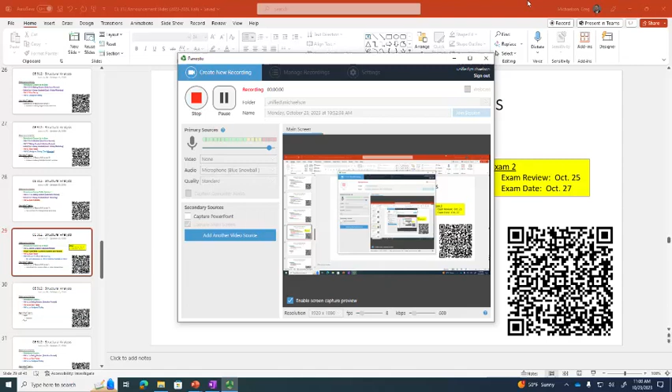Let's get started. Lecture 27. I think we only have 41 lectures, so we're in the last third of the semester. It's one of those things, did it go fast or did it go slow?

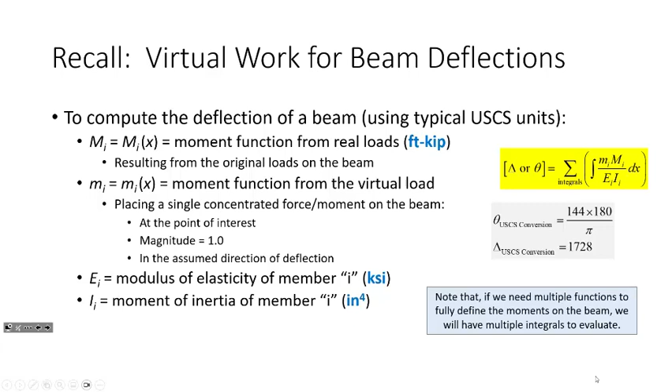More often than not, in real problems we have to sum up a number of integrals, and don't forget we have our conversion factors to consider as well. I want to generalize the method of virtual work a little bit, and I've removed a lot of the subscripts from this just to get to the heart of what we're talking about here.

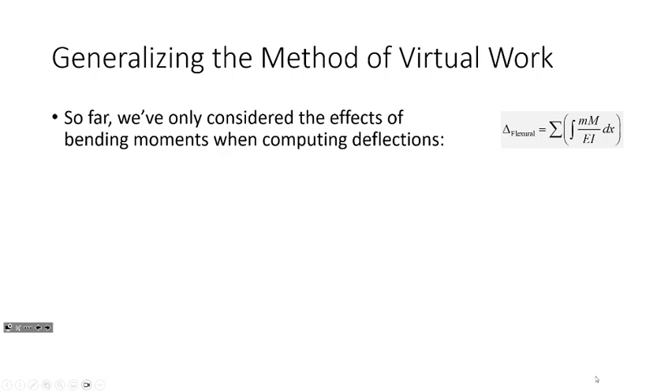So far, we've only been considering bending effects when computing deflections for beams. But in general, for a structural system, if I don't tell you anything about what it looks like or what's going on, then as an analyst you should consider that potentially all this stuff could happen. If we're talking about a truss, we have axial deformation, but for flexural structures we also have flexural deformation. If we were twisting the structure, we might have torsional deformation.

Some of this notation might jog your memory from Engineering 216, Mechanics of Deformable Bodies—remember TL over GJ to get the angle of twist. Shear deformations, I'll talk a little about that later; I'm not expecting you to do anything related to shear deformations in this course, but I want to mention it. And then there's also the potential for thermal elongation.

For example, you take a truss and you heat it up. We're not going to do anything with it, but there's nothing really special about it, it's just basic mechanics you did last semester. What I would say is that as the analyst, when we're computing deflections, we really only consider the terms that are relevant. So for example, if we have a truss and we're not worried about thermal loads, we're only considering the axial deformation terms and taking all the other terms to be zero.

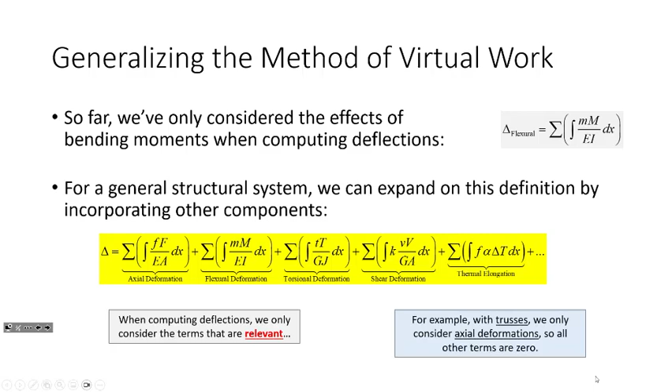But I posit to you that it's possible a structure could deform in more than one way, and considering all of these we might get different answers. We're going to talk about when to consider certain things a little later.

So for frames, if all we're talking about is 2D frames, and all we're talking about is mechanical effects, then I propose we would have three components to consider: axial deformations, flexural deformations, and shear deformations.

Now I'm not going to worry about shear deformations with you right now. We'll talk about that a little bit later. So what we're only going to consider for our purposes is axial deformation and flexural deformation. Now the process isn't going to change. We're still only going to perform two analyses: the real structure and the virtual structure, where we remove all the loads and only place a single load at the point of interest with a magnitude of 1 in the assumed direction.

What I propose to you, and I think the only way to really show you, is to actually do an example. So for frames, just for now, we'll talk about shear deformations later, but if you're only considering flexure and axial, then I propose that for most frames you can neglect the axial deformations. The best way of explaining that is to do an example.

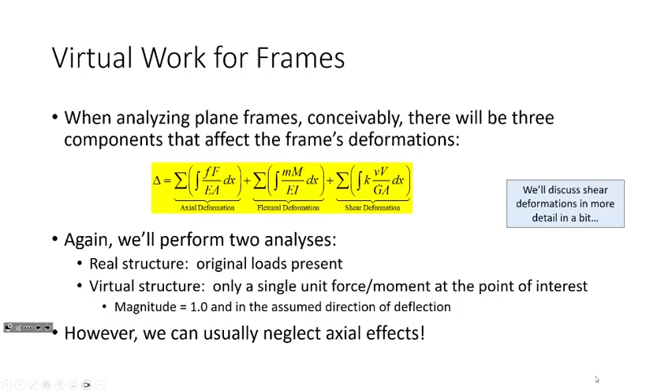So we're going to look at this structure, and we're going to compute the deflection at point A. A lot of the problem is going to be the same. We're doing a real structure and a virtual structure, but we're going to compute the deflection considering two things. The first is we're only going to consider flexural deformations, and the second is we're going to consider both axial and flexural deformations.

And just to be clear what I'm talking about: if I have flexural deformations, I'm talking about the member deforming in a bending type fashion, I'm talking about it bending. Whereas if I'm talking about axial deformations, I'm talking about the element stretching or compressing along its axis. I propose you're going to get deformations from both modes, but one of them you can kind of ignore, and you'll see what I mean.

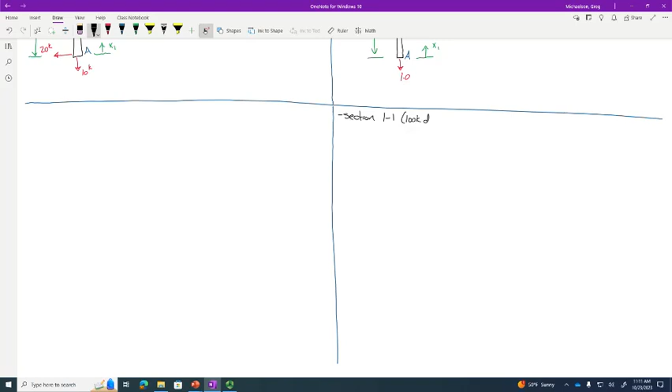So let's start off with section 1-1, and I'm going to look downward. Let me scroll up a little bit so we can see what's going on. So I'm cutting a section and I'm looking downward. Okay, so cutting a section looking downward, this is what I've got going on.

All right, so cut my section. Whenever you cut a section through an arbitrary point in a structure, how many unknowns do you have, at most? If I just cut a section through a random arbitrary point, how many unknowns do I have? 3, right? An unknown force in the x direction, unknown force in the y direction, unknown moment. Everybody with me on that?

So if I look at this, that means I have an unknown force, let's say in the x direction, unknown force in the y direction, unknown moment, right? With me so far? So we'll call this, let's do it like that. So if I sum forces in the x direction, that's going to be here. Let's label these a little bit. Let's call this right here the shear, that the axial force, and that the moment.

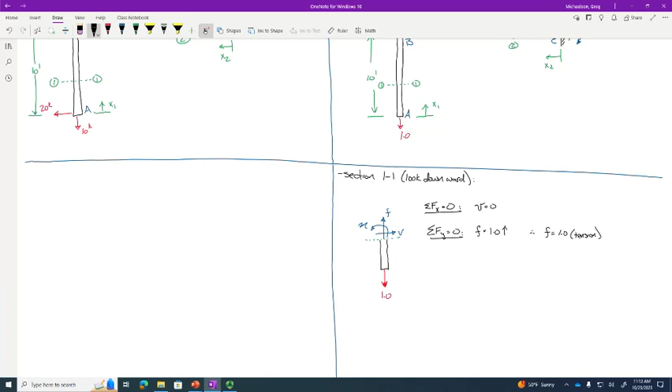Now, if I sum moments, what's my little m? What's this little m going to be? 0. It's 0, right?

So if I were to write this a little more formally, maybe what I'll do is I'll say F, and we'll call it member AB, is 1, assuming tension is positive, and that's from x equals 0 to x equals 10, and MAB is 0, and that's going to be valid from 0 to 10. Does that make sense, what I'm doing right here?

Now, why am I not writing the V? Why do I not care about the V? Because I'm not going to use it for this problem. I'm only going to use the little f and the little m. I could use it later, but right now I don't really care. It wouldn't matter anyways because it's 0. Make sense? So far, so good?

Okay, so now what I'm going to do is this: I'm going to now look at the same problem over here. All right, so now I'm going to look at the real structure, and I'm going to cut a section and look down. So let's draw that out. So I've got—here's my structure.

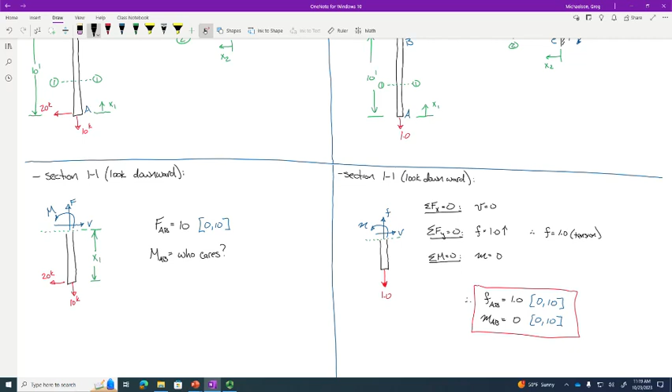That was kind of why I did the virtual structure first. Make sense? So you could argue that in some cases it's sometimes advantageous to do the virtual one first, because you have a better chance of having a 0 force section on a virtual structure since there's a lot less loads. So just worth mentioning.

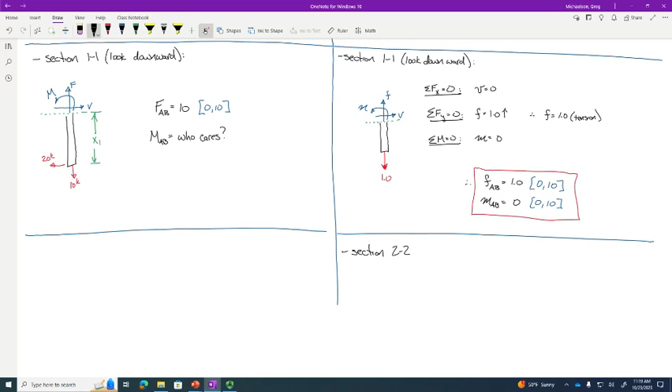So what I'm going to do now is look at section 2-2. Let me scroll up a little bit to make sure we're all on the same page. So now what I'm going to do is cut a section here, and I'm looking to the right. So with both sections, I'm going to cut a section and look to the right. If I cut a section on the virtual structure and look to the right, it's going to look something like this.

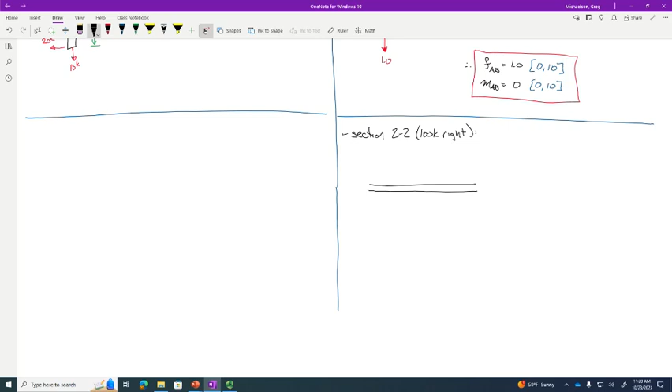Let me give myself a little bit more room here. So if I look to the right, here's the beam, here's my support reaction, and then I've got my reactions over here. This one right here is 1. This one is 20 feet. This distance here, x2.

Okay, and then let's put the unknowns, and we can draw them all, but I'm only going to care about 2 of them. So I'm going to have a V, F, and M, and I'm drawing those in their positive sign convention. When you cut a section and look to the right, downward shears, clockwise moments, and then the axial forces in tension. Now if I look at this free body diagram, what is F?

What is F going to be? 0. There are no forces going to the left or right, so that's 0. And that's going to be valid from 0 to 20. Is everybody seeing how I'm coming up with 0 and 20? Because that's how long the element is, right? The beam, the flexural element right here is from 0 to 20.

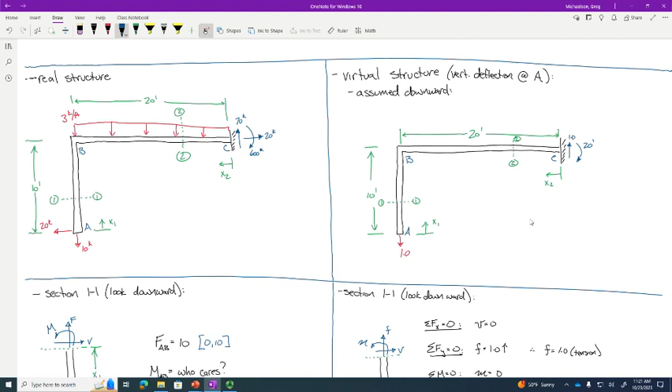So what am I going to say then over here? If I know that this is 0, I'm going to say big FBC is, I'm going to say who cares what big FBC is, because what I'm getting at is that this term right here, that's going to be 0, right? Because this whole fraction is going to be 0 because that's 0.

Now for the moment, we are going to have a moment here, so what I'll do is I'll sum moments at the cut. All right, so we'll sum moments at the cut. Okay, so we're summing moments at the cut.

Do I have to consider any of this stuff in blue? I don't have to worry about any of that. I have 1 times x2, and I have 20 going this way. So I have 1 times x2. Is everybody following along with me on that? Then 20 going like that. And then I've got the m. Here, let me write it like this. I've got the m going like that. Do a little better on that.

So MBC plus 20 is x2. So therefore, MBC is x2 minus 20. Okay? And that's going to be valid from 0 to 20.

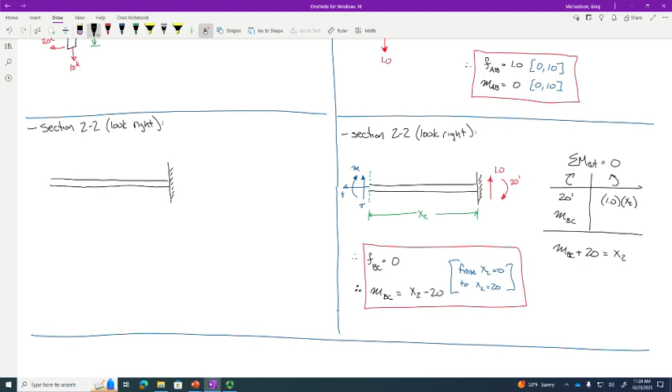So let's get our reactions down. We've got a lot going on here. We've got a 70 kip reaction like that, a 600 foot kip reaction like that, and we have a 20 kip reaction like that.

And so there's where we cut the section. This was 3 kips per foot, and let's just make sure everybody's awake.

What's this distance right here? X. There we go, X. Or X2, because we're using that coordinate system. But yes, it's X, okay?

So what I'm going to do is identify my unknowns, same pattern over here as over here. We're going to have an unknown axial force, so we'll call that big F. An unknown shear, we'll call that V, big V, and then big M for our unknown moment.

Now, what is FBC over here? I mean, we can look at it, but really, who cares? Nobody cares, right? Because ultimately that big FBC is going to be multiplied by 0, and that whole term is going to go away.

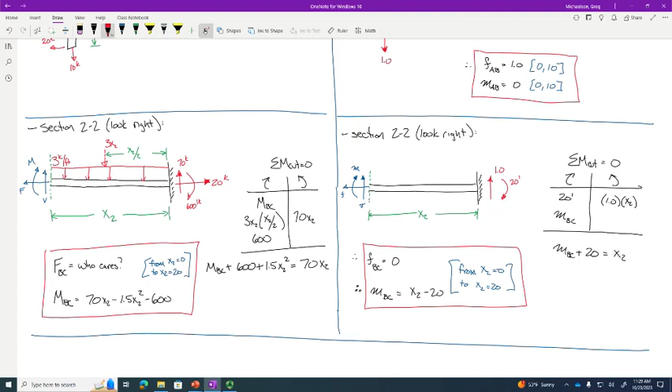So far, so good? Okay, I'll give everybody a sec to catch up with me. Scroll down a bit.

So the way I'll handle the method of virtual work, so you see what I've got here going up on the board. What I'm going to do is handle the flexural first, then the axial. So let's go ahead and evaluate this, okay? And you can see the two that I'm really going to have to worry about are these two right here. So what I'm going to do is handle delta flexural.

And it's going to be the sum of the integrals of the little m, big M, over EI. Okay, which is going to be what? So we're going to have, so let's not forget our 1728 over EI. So for this structure, every member has the same EI, so that's going to make that part a little easier.

And we're going to integrate from 0 to 10, little MAB, big MAB, dx. But remember, we already figured out that that one was going to go to 0. So really all we're going to have to worry about is the integral from 0 to 20. Maybe I should put dx1. Little MBC, big MBC, dx2.

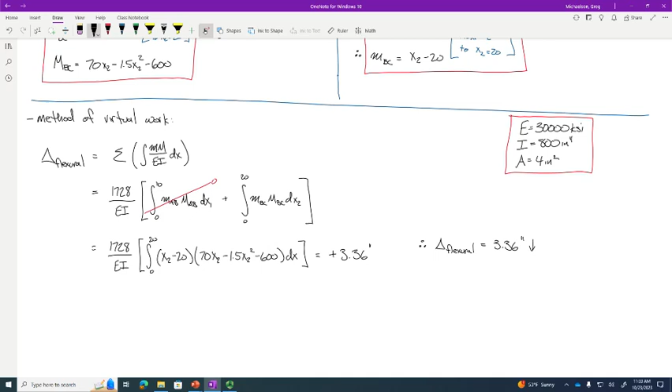When you chug it out, you're going to get an answer of plus 3.36 inches. So I propose that delta flexural is 3.36 inches going down. Why am I saying it's going down? Because I put the virtual load going downward and got a positive answer. Everybody with me on that?

So if you're okay with that, for delta axial, this is sort of like what we did with truss analysis. All we're doing is summing up. If we want to get technical, what we really should be considering is that we're summing up the integrals.

But for both members, the forces were constant, so really what we're just summing is those fractions, which is little f, big F, L over EA, plus little f, big F, L over EA. But like last time, we have one of these going to zero. This one's going to zero because one of the virtual forces was zero, so we know we don't need to worry about that term.

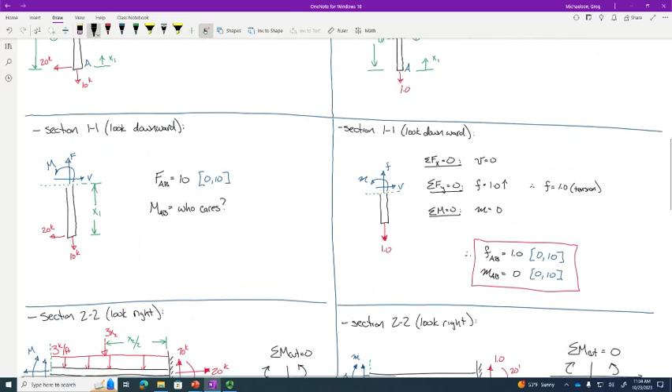So we plug and chug, we'll just worry about this fraction right here. We got little f of 1, we got big F of 10 kips, we got the length. What is the length of member AB? Sure we're all paying attention. 10 feet, right? We're just talking about this column element right here. So that element is 10 feet long.

All right, we've got, bless you, so we've got a 30,000 KSI here, and a 4 square inch area here. Does anybody see a problem?

Anybody see it? Well if we just chug this out, what's our answer going to be in? Follow with me on the bottom, KSI in inches squared. What are the units of the denominator? If we have KSI times square inches, kips. And what are the units up top? Kips times feet. So if we chug this out, we're going to get a deflection in feet, right? Do we like deflections in feet?

More often than not, the answer is no. Because if anything, we want to compare to this. So what I'm going to do is what we did for truss analysis and convert so that we get an answer in inches. Now just to make sure you at least break out your Casio FX 115 ES Plus or similar scientific calculator at least once in this class, what do we get when we chug this out? I'll give you a hint, it's a small number. It's positive, by the way. Anybody have an answer for me? 0.01, there we go.

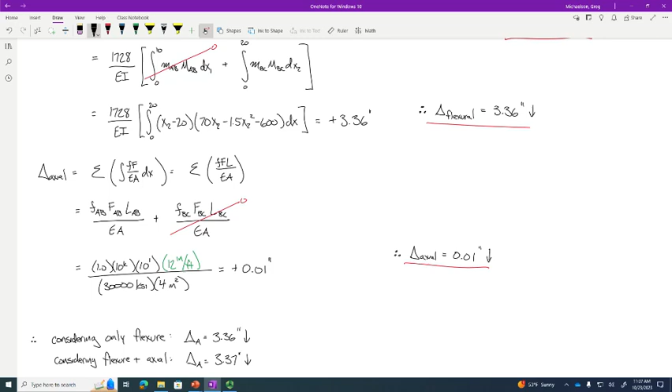If I consider only flexure, then the deflection is 3.36 inches. If I consider flexure plus axial, then the deflection's what? 3.37, exactly. So did doing all that extra work for the axial deflection really matter all that much? No, and to be clear, in most frame analyses, that will always be the case.

Now what we're doing here, though, I do want to make one point. Whenever you're running a software analysis, it will usually compute both by default. So if you're running an analysis and trying to check it by hand, and you're getting this and the program's getting that, theoretically, if the structure's determinate and you're handling rounding and everything, you should get the exact same answer. So if you're getting something different, this might be why. If you're only considering flexural deformations, your deflection might be a little bit different. Everybody with me so far? Does anybody have any questions on the example? Hopefully this is pretty rote at this point.

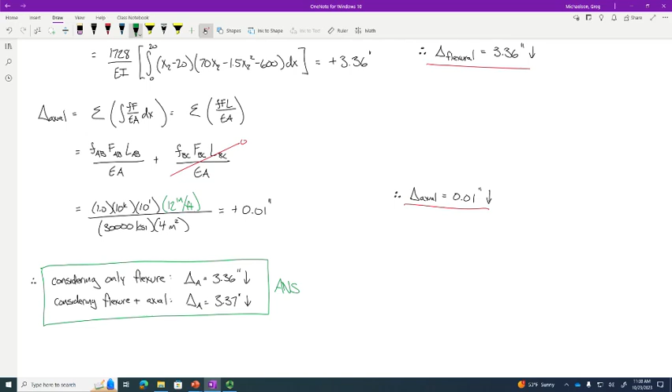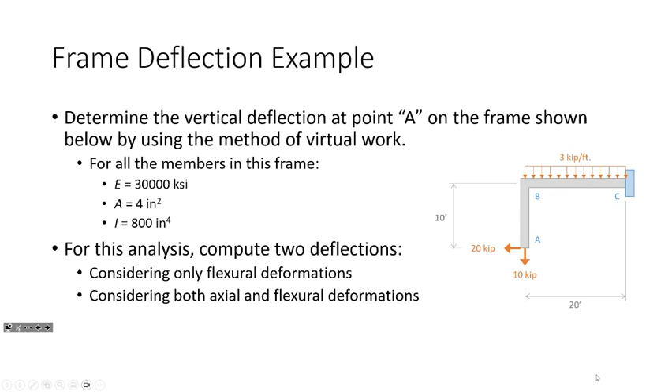All right, I do want to talk a little bit about shear deformations, and then we're going to call it for today. I want to be clear, I'm not going to make you all do any shear deformation problems, but this is more food for thought for later on in your structural engineering careers. So just to make sure we're clear what we're talking about with shear deformations, if I have some beam, some element, a flexural deformation is a mode that looks something like this. You're actually taking the element and bending it, okay?

A shear deformation would be if the element is actually undergoing a shear. So in other words, what we're trying to do when we consider shear deformations is consider this effect on the element—it actually undergoing this change in angle.

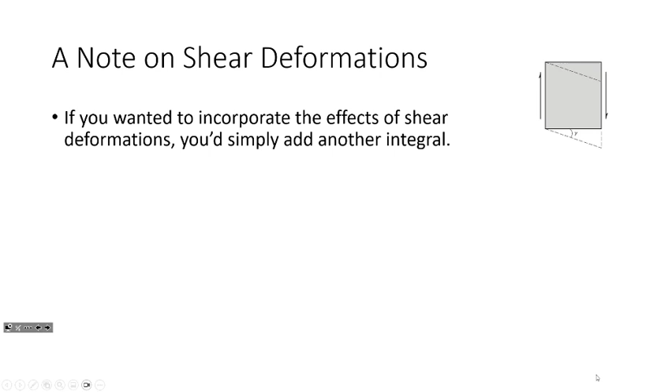Now, if you wanted to incorporate shear deformations, you just add another term, and the format of that term is pretty straightforward. So if we have little m big M over EI, or little f big F over EA, in order to account for shear deformations, we just add little v big V over GA.

Now, whenever you do the derivation, there's a little bit of extra stuff left over related to the beam's geometry, and so we throw that into a term we call K. The fortunate thing is K's are lookups.

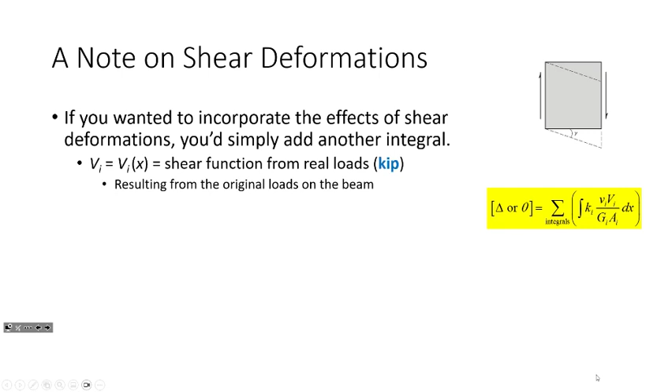So what do you need? You need a real shear function and a virtual shear function. You derive them the same way—real structure, virtual structure. In the virtual structure, just remove all the loads and place a single load on the structure with a magnitude of 1 at the point of interest in the assumed direction.

The G value, that's the shear modulus. Do you all remember that from Engineering 216? So materials have an elastic modulus, a Young's modulus, but they also have a shear modulus. You can relate that with Poisson's ratio—remember, when you take something and stretch it, it also gets thinner. Bring all that stuff back.

We need the cross-sectional area of the member, but then there's this term K. Again, K is just these leftover terms from the integral related to the beam's geometry, but the nice thing is you can derive those. So if you have a beam that looks like a rectangle, K ends up being exactly 1.2. If you have a circular beam, K is 10/9. If you have an I shape, K is close enough to 1 that you can just use 1. And whenever you're using an I-shaped beam, the area is just the area of the web, the middle part—remember, flanges and web.

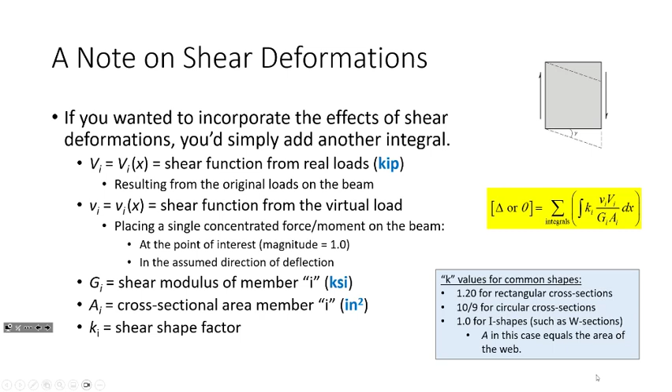Now, one of the things I want to mention is when should you consider shear deformations? Like when, as the analyst, do you even care? Shear deformations start to matter when the beams get deep—when you have really, really deep beams. And what I mean by deep is an element that is deep when compared to how long it is. So there's a couple real world examples I would mention.

One of them is what's called a transfer beam. Have you ever been in a really large hotel where the lobby extends over a couple different stories, and then the rooms are on top of that? You have this really large open lobby—well, there's going to be some really heavy beams holding up the rest of the building. We call those transfer beams or transfer girders. Those suckers are really big because they're holding up the rest of the building, so they're really deep compared to their length. This would be an element where you'd probably want to consider shear deformations.

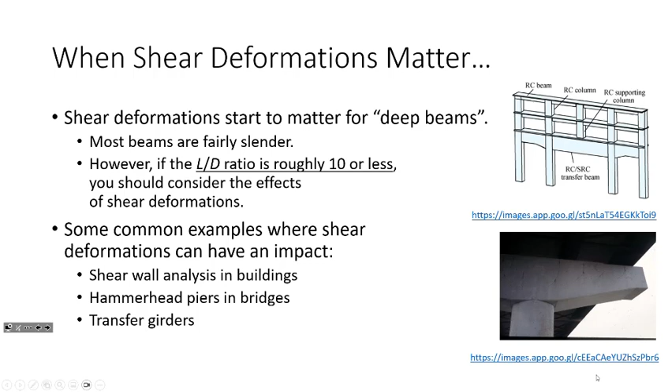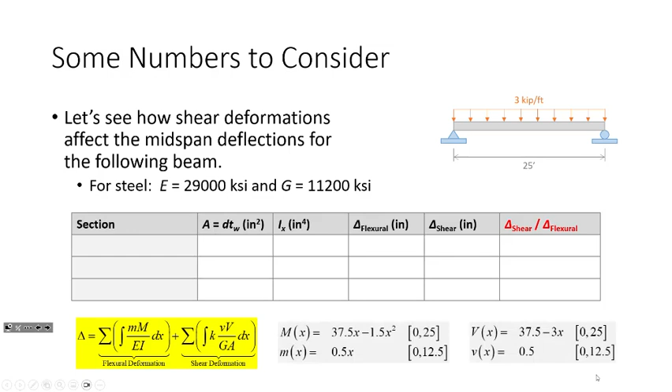So if you want, you could follow along with this, this could be something you do on your own. I've got real and virtual functions, and I'll integrate from here to here and just double it to get the answer.

Let's start off considering a W14 by 26. Remember from the analysis project, what do these two numbers mean, the 14 and the 26? The 14 is generally about how deep the beam is. The 26 is how heavy it is. So a W14 by 26 is about 14 inches deep and weighs 26 pounds per foot.

So I have a 25-foot long beam, and the beam is about 14 inches deep. I went ahead and computed its L over D ratio, so it's about 20.6. This is a somewhat slender element. This is the area of the web, and this is the moment of inertia, because we need both the moment of inertia and the area.

Now what happens if I go through and chug out the deformations? I get that the flexural deformation is about 3.7 inches, and the shear deformation is about 0.071. So if I divide the two, this is only about 1.9% of that. So in a problem like this, you could probably just ignore the shear deformations, you don't really need to consider it.

But what happens if I keep everything the same, but use a deeper beam? What if I use a W24 by 76? This is a bigger element, with a bigger area and bigger moment of inertia. It's just a stronger, stiffer element, but it's also got a smaller L over D ratio. Now what's going to happen to the flexural deformation and the shear deformation? They're both going to get smaller because the element's getting bigger.